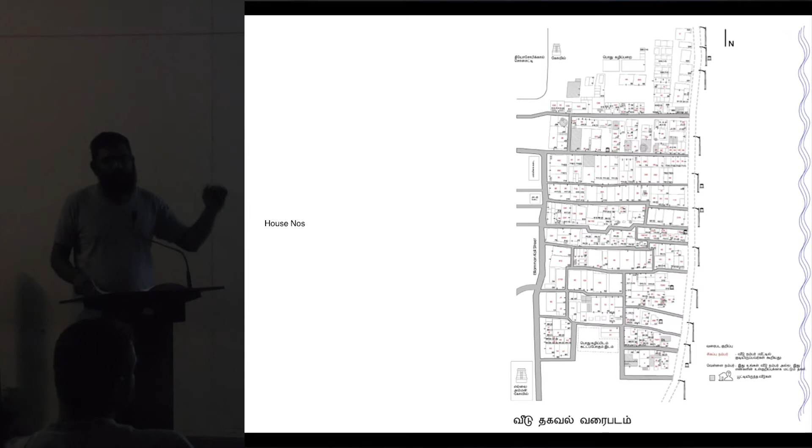Interestingly, most of these houses don't even have house numbers. From the beginning, it was a hurdle, so we actually gave them house numbers. From then on, they would refer to that as their house number for every meeting they would attend. Nature of buildings, whether kacha or pakka, you can see the legend out there.

Building heights, toilet infrastructure map, which was primarily what we were there for.

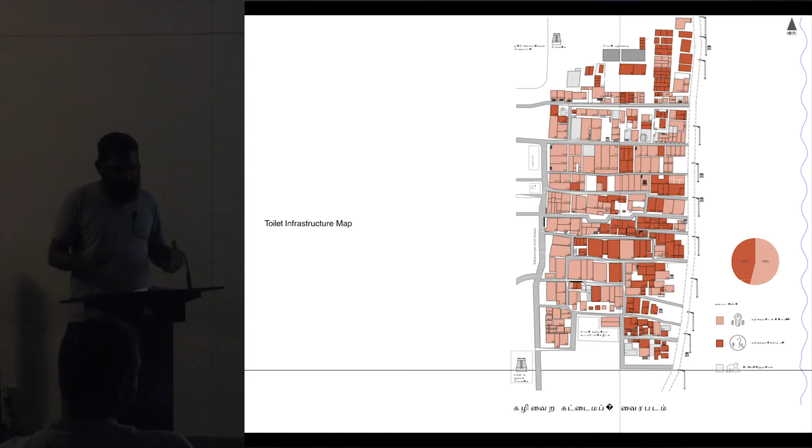What we found was it was not just the untreated sewage, but many of the households did not even have a piped water connection. So it kind of combined both these issues, and the issue kind of compounded.

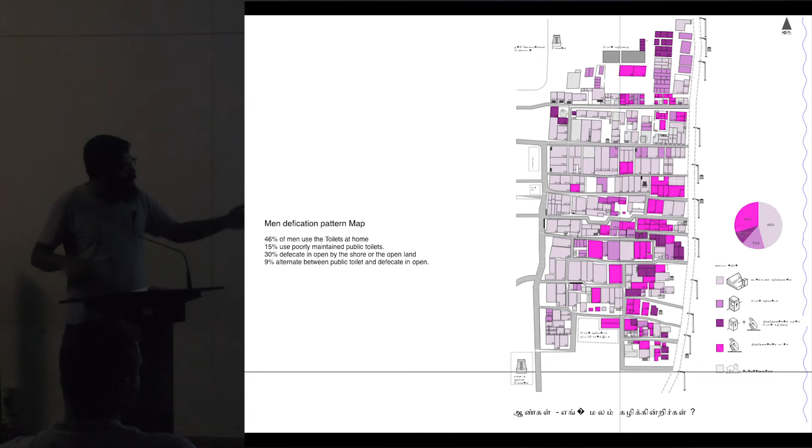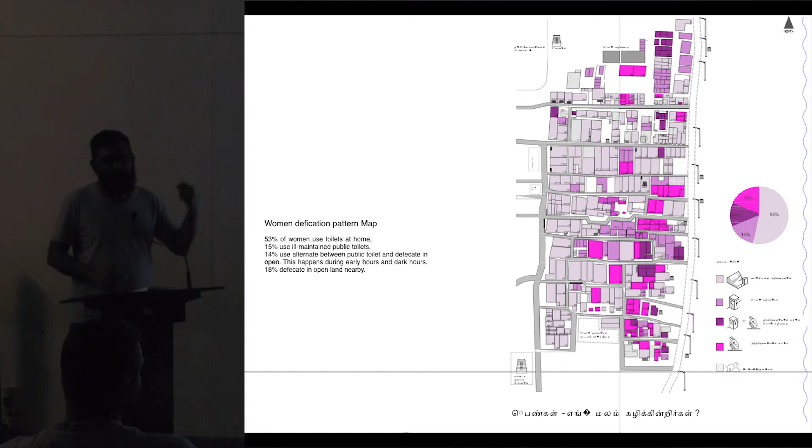This was a men's defecation pattern map, showing when men defecate, in the mornings or evenings, with a completely different pattern depending on the household. That's the women's pattern. Most women would actually defecate in the neighbor's house, or they would choose to go for defecation only before dawn and after dark.

So that was primarily the document that we took to the authorities, to show the wastewater discharge pattern. Roughly about 50 to 60% do not actually have toilets, and it is primarily because of that all these issues were compounded.

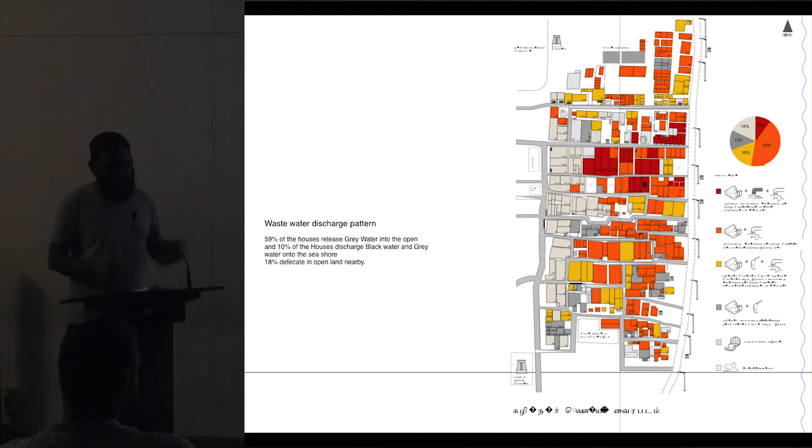We held community meetings to arrive at a proposal. Again, when I say we, it's not just me - there was a collective, urban designers, UDC was part of it. There were also activists, Vetiver Collective, who work with all these - basically environmental activists who work along the shores of Chennai. There were also other agencies who were part of it.

Based on our calculations, assuming 90 liter per capita consumption per day, we arrived at a DEWATS system. So that's basically the proposal of the project.

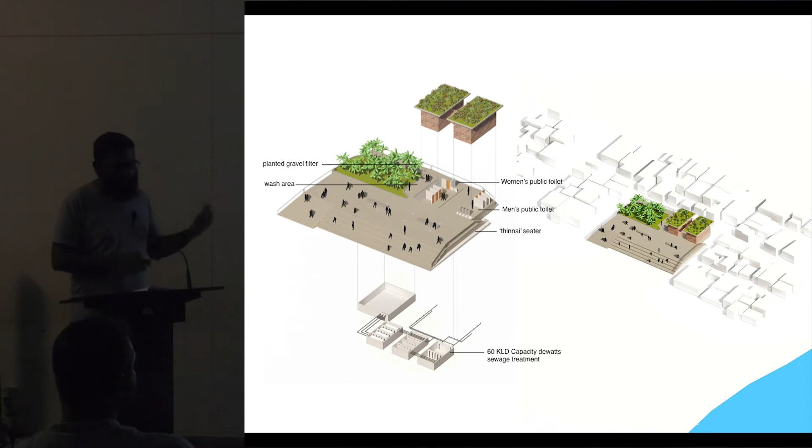We came up with a DEWATS system. On top, it became a public space, and there was a public toilet for men and women added to the commons. This is a project that demonstrates community infrastructure as a public space and helps the village permanently reclaim their commons from the very infrastructure that was denied to them.

The status of this project is funds were allotted for it, but it was stuck for some time since we did not have any local body elections - for almost 3 years we did not have any local body elections. So now things have started again, and hopefully for the community we hope to see this project take shape soon.

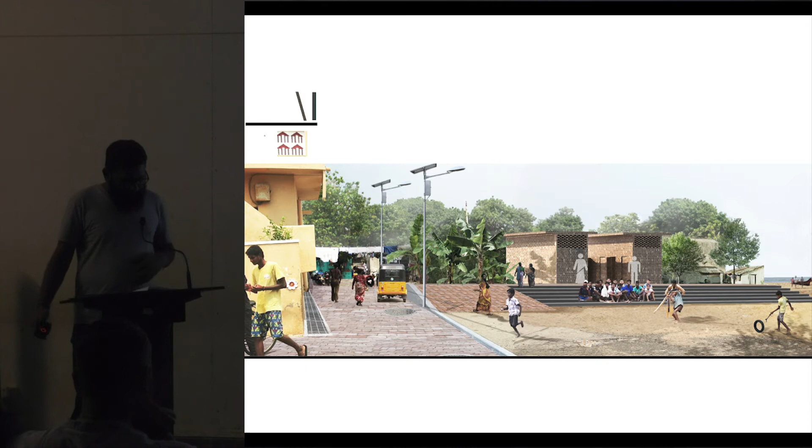What plagues this school is twofold: one is ad hoc construction, and the other is poor infrastructure. Ad hoc construction, because the toilet block is added by an MLA's fund, a local councillor adds a stage for CM's birthday, central funding adds a smart classroom. There is no coherent plan, basically.

Poor infrastructure, poor toilet ratios. I think the toilet ratio was roughly one WC for like 35 to 40 kids, and the standard is about 20 - so roughly you need double the number of WCs. Very high student densities and no separate funding for maintenance.

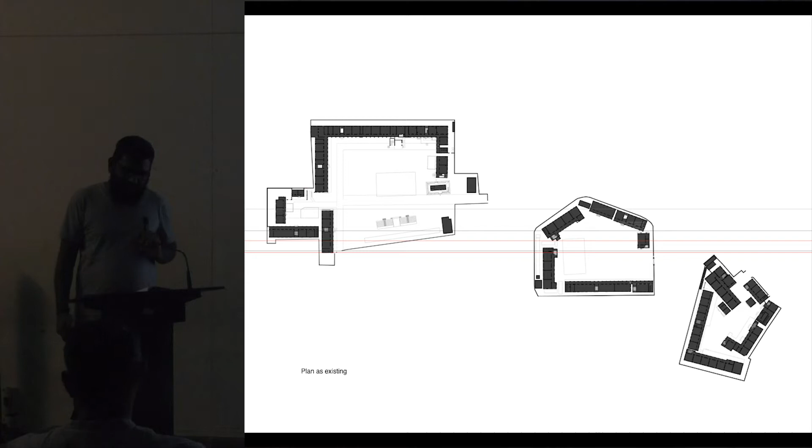While these are visible issues which can be fixed by increasing the number of well-designed classrooms and toilets - this is one of our interventions where there was an existing toilet block for kindergarten kids, and we said we can do this. This can be fixed in some sense, if you have the funding and it is available at the right time.

But what is invisible is the mental state of these kids. Typical demography of the school children is that they form the lowest strata of society. Many of them are raised by a single parent or by grandparents or relatives. Their parents are maids, helpers, hawkers, and daily laborers living in the city. Except for a few teachers, others really look down upon them - that's the kind of mental state of the kid.

This particularly leads to vandalism, theft, and extreme hyperactivity - all these kids are extremely hyper. At this point, we realize the objective of the project is beyond functional requirements. So how do you then tackle such a situation? Chennai Corporation was interested in revamping government schools, and as a pilot, we are now given 3 schools to demonstrate the possibilities of how we can tackle this issue.

We also know that our approach has to be very surgical in nature, as we have limited means to create most change. Design with limited moves that can change the way the kids perceive the school. So I think a lot is about the perception of the school more than actually the physical infrastructure.

So we approached the project like designing in a city like ours, there's hardly anything designed for children, and I'm sure it applies to all our cities. Especially kids from these backgrounds, because people in a slightly higher strata have other places, they go to a mall, there's bowling alleys. But people from the lowermost strata do not have that option, there's nothing designed for them. And this Chennai school project seemed to be the right opportunity for us to work around that idea.

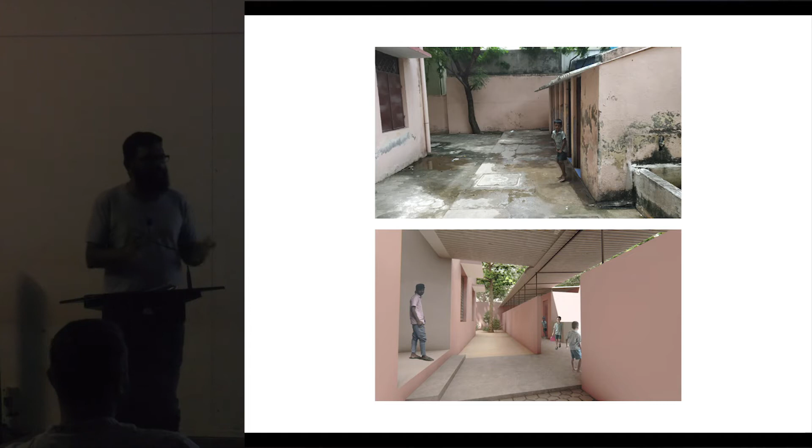We are still kind of tinkering around it, but I'll show you some ideas. So we approached the project like designing a public space for children. We applied all the principles of public space design to enable these kids to reclaim the space in the city, so that when they come into the school, it feels like it's actually for them.

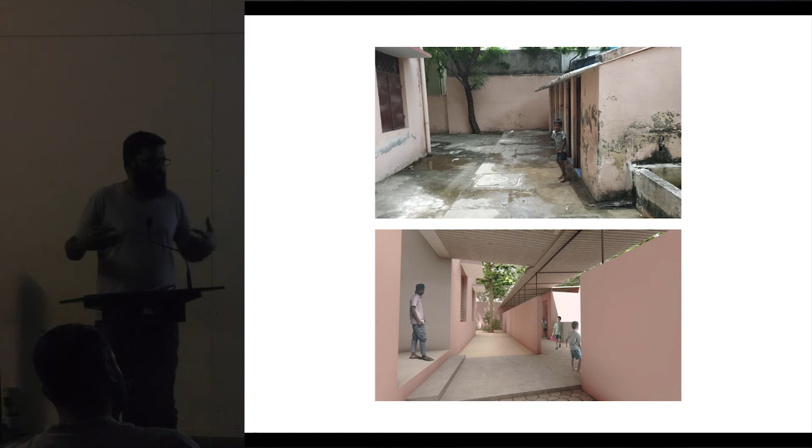So the first thing we did, our first move, was to remove these grills. The reason why this grill was added is in earlier days, to avoid drunkards using the place during after school hours or on Sundays. So they always had the grills. Today they all have CCTVs, security guards, so technically you can get rid of that, and it opens out the place like this.

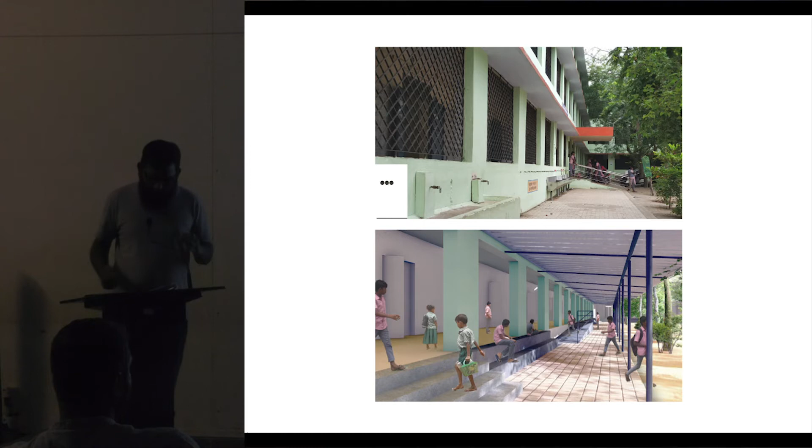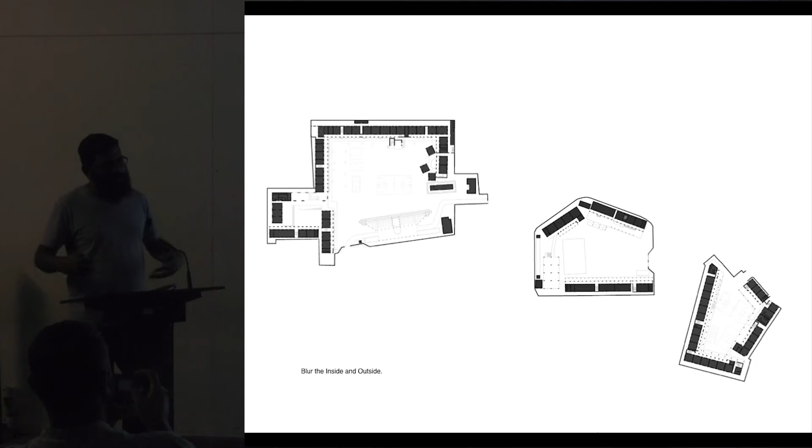We also proposed an additional shaded corridor where they didn't have one. And what this led to, is this existing plan - it's like a nolli plan, blurring the inside and outside. So the exterior became a lot more integrated to the inside.

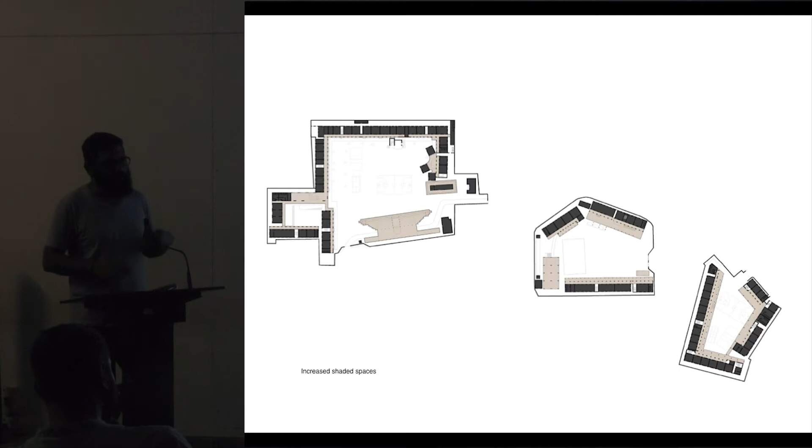It also increased the shaded corridor - these are all the shaded areas where they can conduct different activities. Vertical learning was possible, kids from one group can interact with the other. And if you look at the section, suddenly, this was all the typical section - suddenly all these newer dimensions were possible. New spatial connections were established.

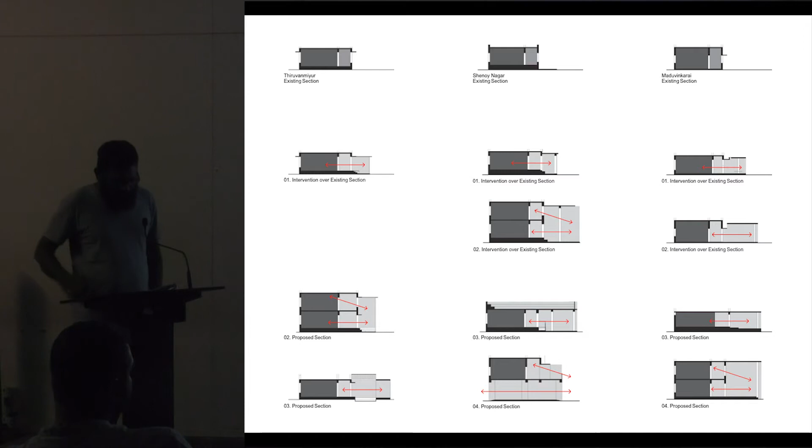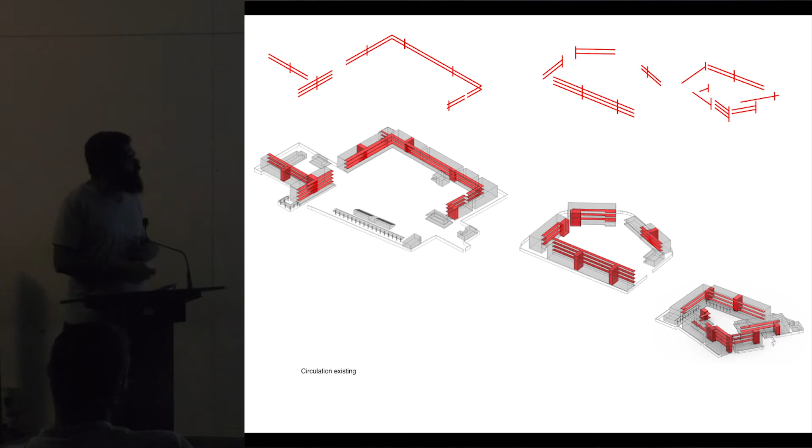Serge Salat - I met this man who basically studies urban morphologies and advises cities on newer developments in China, and in apartheid neighborhoods of Africa. He claimed that the grid is the most democratic form because it offers maximum choices. In order to enable that, we connected all these with bridges. So what was only one possibility for the kid to go up and come down suddenly became like he can climb here, go all the way here, come down here - suddenly the choices became a lot more.

And this we hope will kind of make the school more inclusive and cohesive.

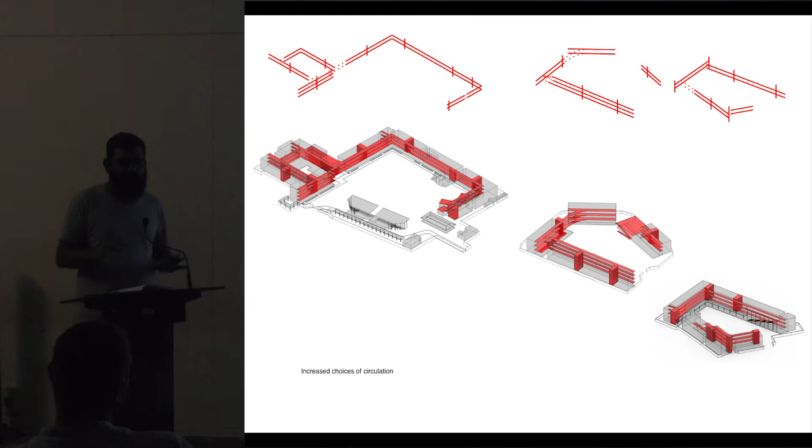We proposed a covered space - after seeing all this, suddenly the deputy commissioner got very excited. He said, we'll give more funds, do more proposals. So we proposed additional covered multi-use space, and finally, like a typical urban space, we added a landmark. So there was a new facility added, at least one in each school depending on the strength, which is kind of unique to that school.

So this is actually a kindergarten in a 3.3 acre campus. They also had partly amphitheater gallery kind of seating, so we kind of added a roof above.

This is actually a school about 1.14 acres, and we added a first floor, just the first floor, which was extended to add a gallery and a kabaddi arena. And in this school, the stair itself became that sort of active landmark.

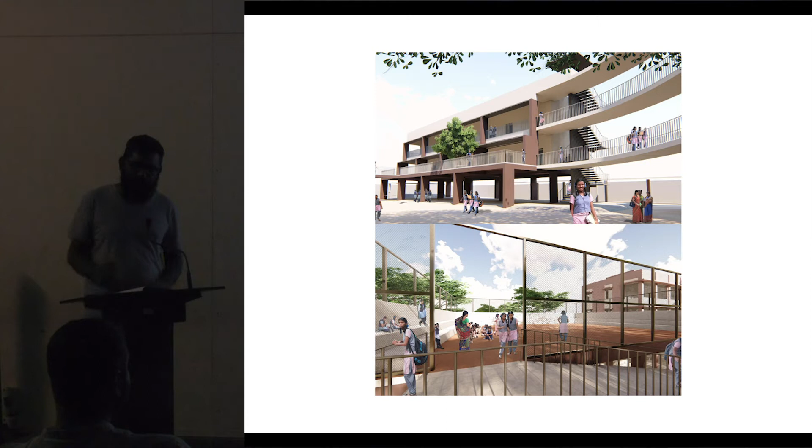So we hope this will bring about a change to the perception of the school, and most importantly, have a positive impact on the child who grows up in these environments. So these are some of the proposals that we made.

Moving on to the second preoccupation, which is in the city. So this is the first project, Shop in a Park - a project about creating a public space in a private realm. If you're familiar with the geography of Chennai or Tamil Nadu, you'd know ECR, East Coast Road, one of the most scenic roads from Chennai that goes all the way to Pondicherry and Rameshwaram, and now extends up to Trivandrum. This is one of the first commercial developments on that road within the Chennai boundary.

The client had dreamt—I use the word dreamt because he dreamt—of creating a typical mall with an air-conditioned atrium. So that was the brief that was given to us.

But unfortunately, the approval for that dream was refused because the site was on an aquifer recharge area. An aquifer recharge area is where you need more land so that the water would go in and recharge the water table, so you need more open space.

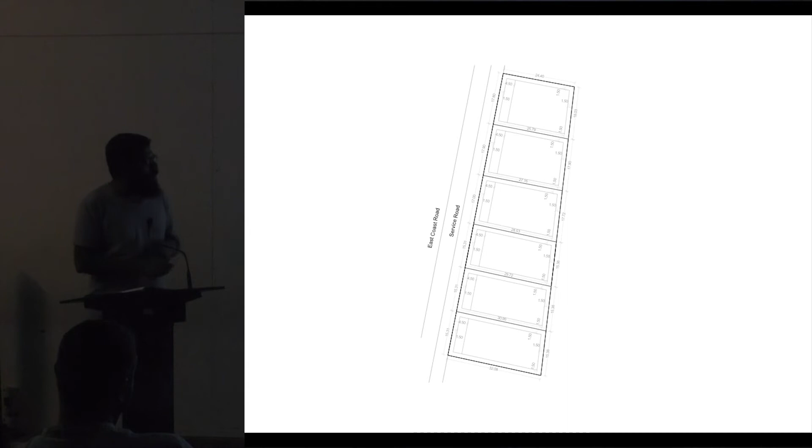So eventually they had to divide the land into 6 such blocks, and each one had a separate block. So what was a kind of cohesive atmosphere of a mall suddenly became like 6 blocks. And that was essentially our challenge—how do you work with that to create a commercial space?

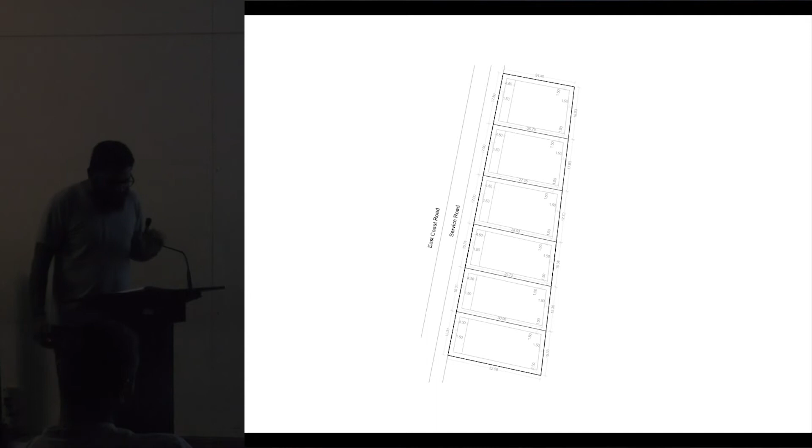So first, what we did is we put all the blocks together. If anybody who has worked in a retail environment knows, the interior of a retail environment is more like a mediated experience—your experience is less sort of spatial. So we wanted to create that spatial experience through this project.

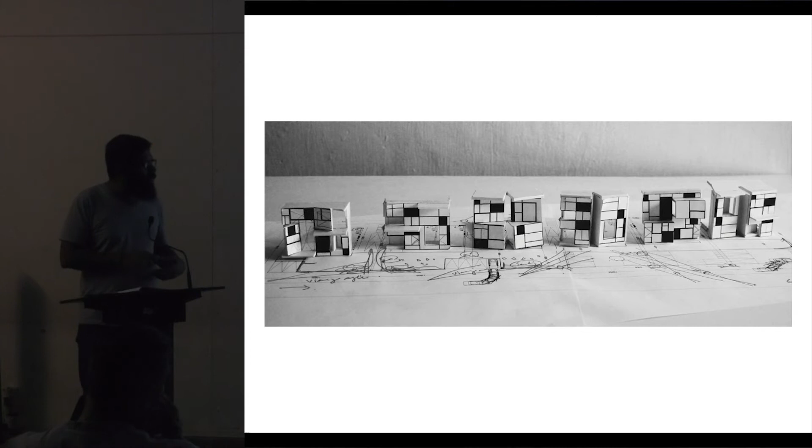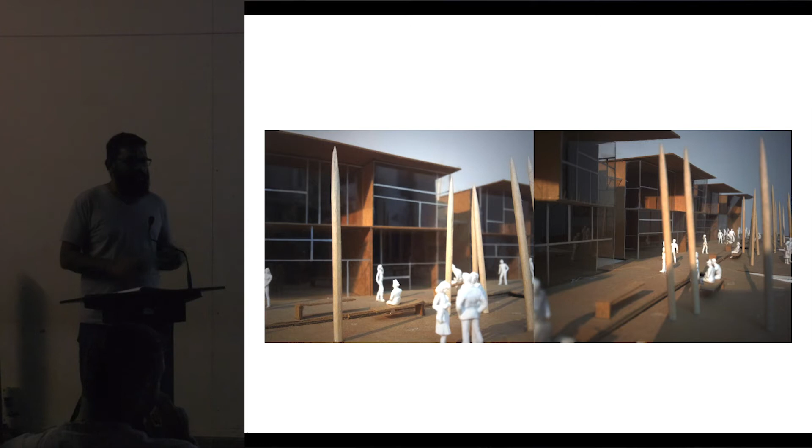And the first move we did is to articulate the facades, create some interest to break the monotony. We also knew the blocks needed to have a canopy because it was west facing, so that added the next layer.

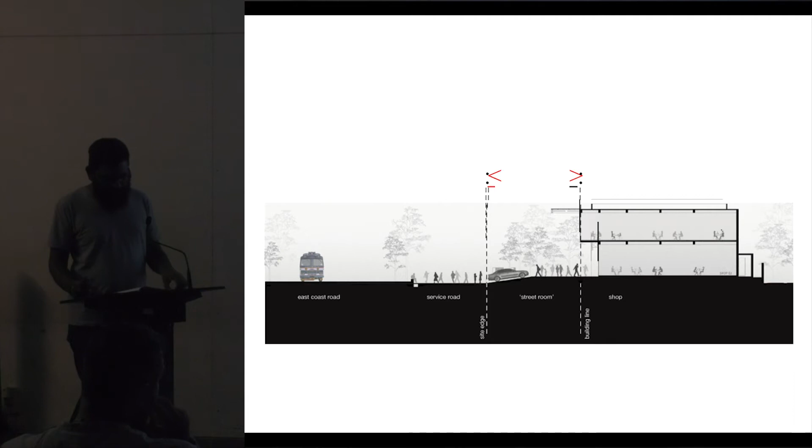So our intent was to design a public space. We designed basically a street room. We found this text by Guy Debord that puts the idea more eloquently, but we found this much later—at that time, we called it an urban room.

The notion of a street room reverses the false distinction of open and closed ambiances. The closed ambience itself opens onto the open ambience, which is demarcated by a closed ambience—basically, two different conditions defining each other.

And there it was born, the idea of a shop and a park. So we said, okay, these blocks were shopping blocks—what if we imagine the space around it as a park?

And at that time it also dawned on us that in order for this project to be held as one cohesive space, you needed a continuous roof, not a roof that is sort of separated.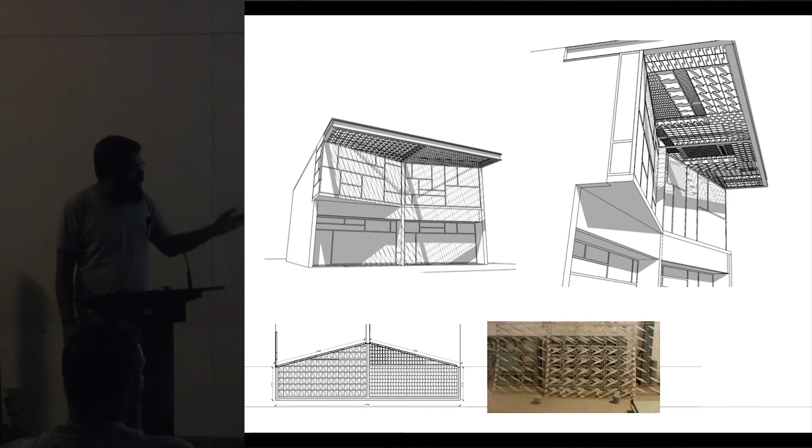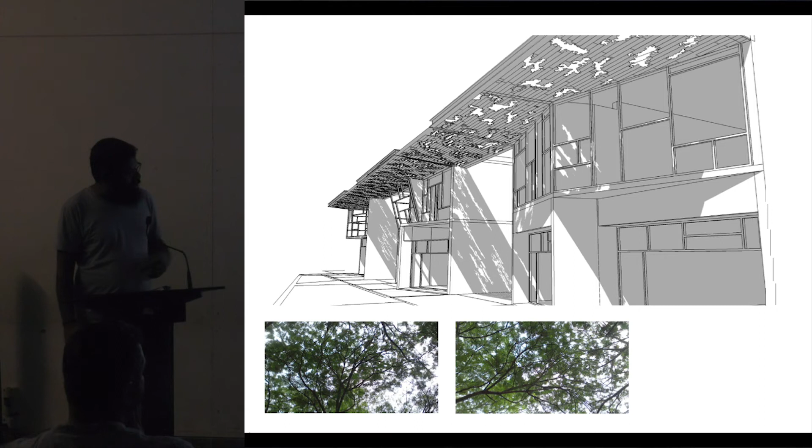We did various iterations of the roof using different materials. This is a laser-cut steel scrap which we used as a roof. This is again laser-cut, of a different size. This one is punched—this is a perforated sheet, cut like a canopy, like shadows.

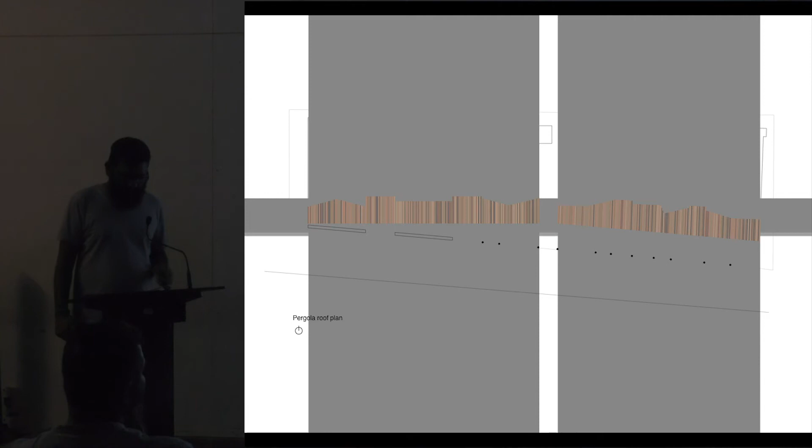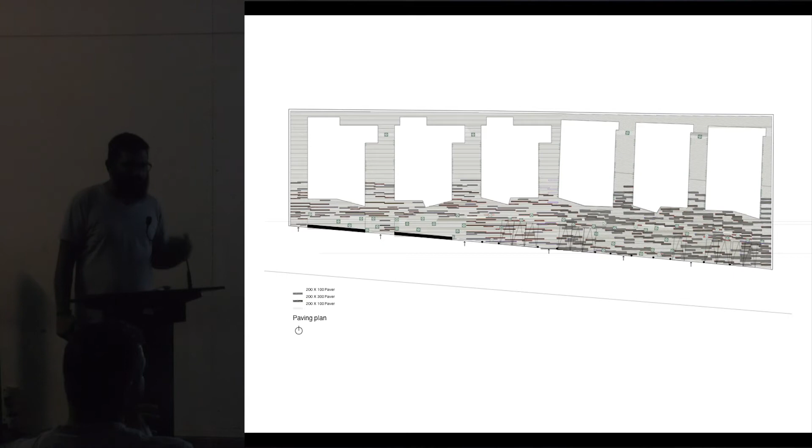And then finally we ended up with good old pergolas as the roof. Once the direction of the pergolas was decided, then we decided the direction of the paver as well. And that's the project.

So this was the first commercial project on that stretch. The moment we completed this work, we had so many offers—like everybody had a parcel of land and wanted to do something similar.

And suddenly there were many copies on that street. So these are like 2 such copies. This guy, in fact, was the first one to come to me, and the moment we gave a quote, he never turned up—and then he had the same canopy, same gray, ground level.

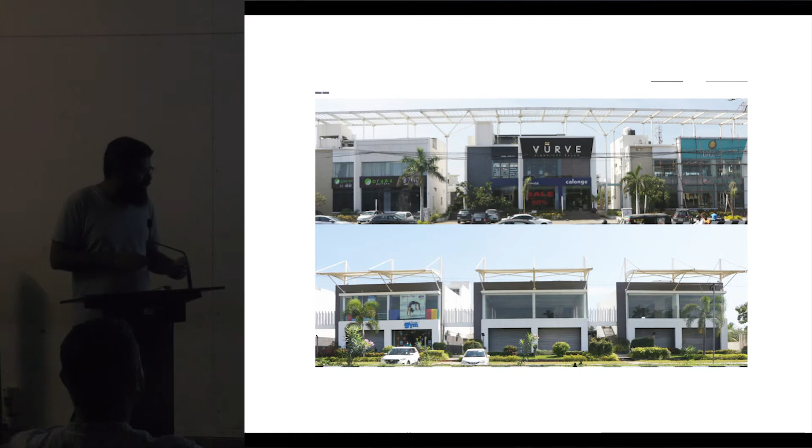And this was another one, which was actually happening in parallel. The moment we put a canopy, he put his own sort of trellis stuff.

And what happened is we ended up having another client who said, we want you to work with us—same 6 plots and same 6 blocks.

So we took the idea of the street room and created more meandering spaces—so this is the service roads, and from here you create more meandering spaces. And this was the first proposal we gave.

Unfortunately, we didn't succeed in our efforts to convince the client. The client was extremely stubborn—they wanted only a sequel to Shop in a Park. They were clear, they wanted the same plan. It works for Vastu, nobody complains—so they just wanted the same thing, right?

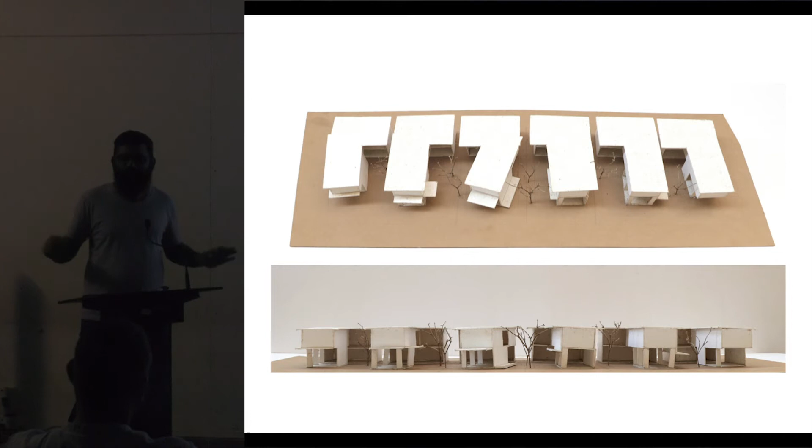So what we did is we kept everything the same, except that we added a sort of—in Tamil we call it pandal—which is like a tent-ish kind of structure. And that's all we did. It's the same block, we just added this.

And we thought this is a good opportunity to explore the idea of public art in a private building, because the entire thing is open for you. So we wanted to work on some kind of graphic around this place. What I'm going to show you next, the set of 6 slides, is what we showed the client, except a caveat I'll tell you at the end.

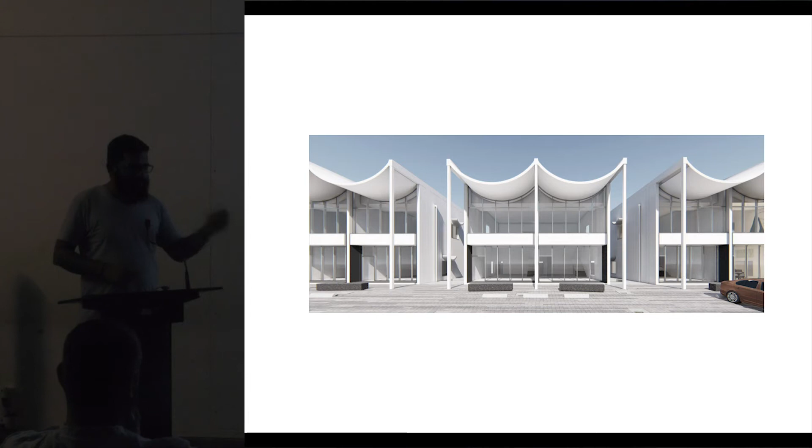So we said, today's religion is consumption. And temples are today's shopping malls, right? And they had frescoes then, so you ask what's fresco today? Basically these frescoes, these murals, were interactive and participative.

They were either preaching something, or about conduct, or about myth, all kind of bringing you closer to God. So what is today's God? Your products, your iPhones. So we made a list of products and said okay, we'll just throw them around the ceiling. We call this the black hole graphic. It's about consumption, an object, a brand, a lifestyle, things that suck you in, objects floating in space without reference.

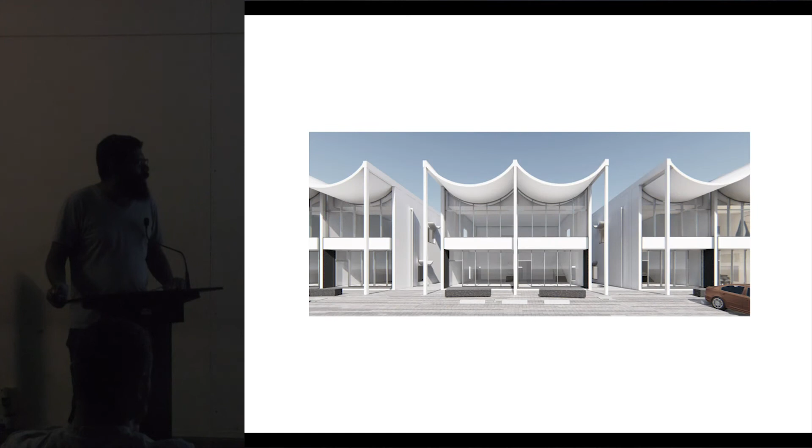It's kind of participating, that's the issue. Once you identify one object, you start slowly looking for what's the next. And then this is what we did, from there to there.

And that's the street, and that's the project executed. We are in the final stages, so that's the executed project. And the caveat is we did not show him the black hole concept, we just said these are flowers of consumption. And they bought it, so I'm happy.

So the second or third project in this is a book building, one of our first projects in Chennai. In this project, patterns that you see every day in a city are used as an iconography. It was for a client who made these beautiful handmade books, if you know Tara Books. So our client was that, and it was on a tight plot.

So this is the book. It was an extremely tight plot with a laundry list of requirements. The building should house a bookstore, small exhibition space, administrative office, editorial, and accommodation for visiting artists, all packed in this space, almost like Bombay style.

So the design was fairly simple. We exploited the bylaw. In Chennai you can either do stilt plus two, or ground plus one with a mezzanine. So we combined these two bylaws to create the basic organization, and it went from public to private.

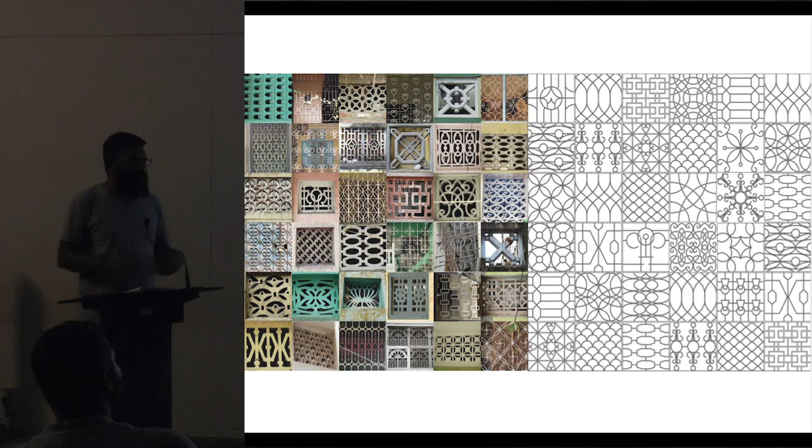And then we did this collage of grills, which became the sort of image of the place. For the making of these grills, we had a fantastic fabricator doing that, and that's what it does when the sun shines. That's the project.

We designed the top floor accommodation almost like a village. We called it the village because the first story they said is, this place needs to have warmth, because most of their tribal and folk artists, when they come to the city, just can't relate to it. So they needed that, and this is probably the first place they'll land up, so we wanted to evoke that sense.

That's the exhibition space. That was, I don't know if it still is, at that time the largest Gond art by Bhajju Shyam. I think he won a Padma Shri last year.

And that's how the space is. It works with the community. They do workshops, it's kind of open. The ground level is pretty much open, anybody can just walk in.

And the success of the design is, this is on the tote bag of Tara Books, and they use this in the exhibitions. So when we saw this, we were kind of laughing to ourselves, patting us at the back, saying that yeah, I think you really came close to the ethos of the place.

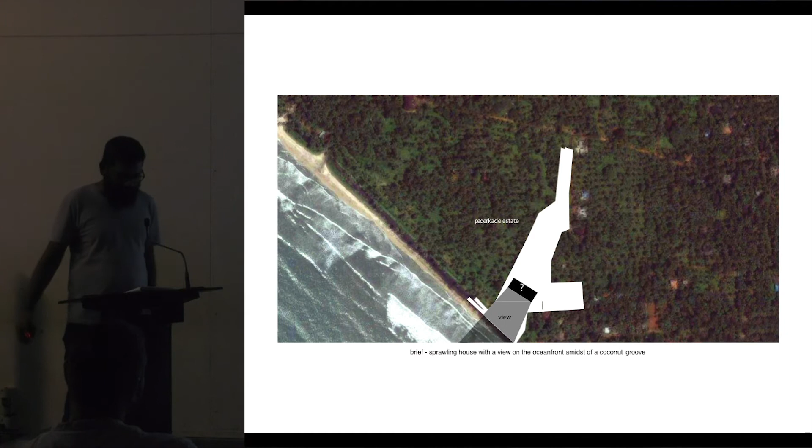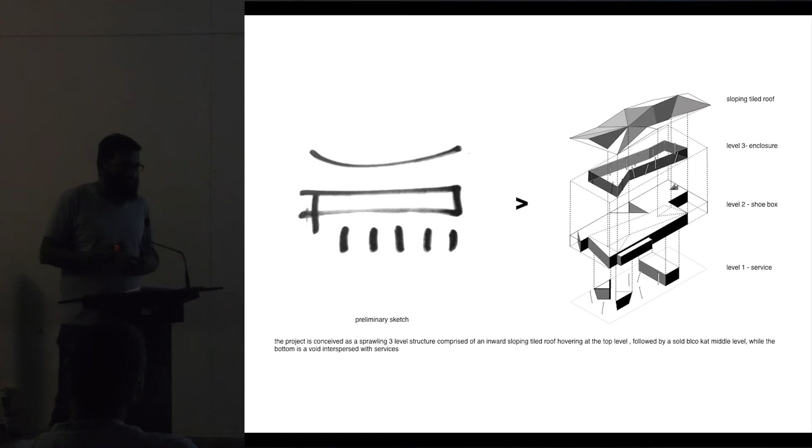So that was the preliminary sketch, and that's how it kind of took shape. I said, I will give you all that you ask, but I will give it in the way we want to give it to you. So that's how it kind of panned out.

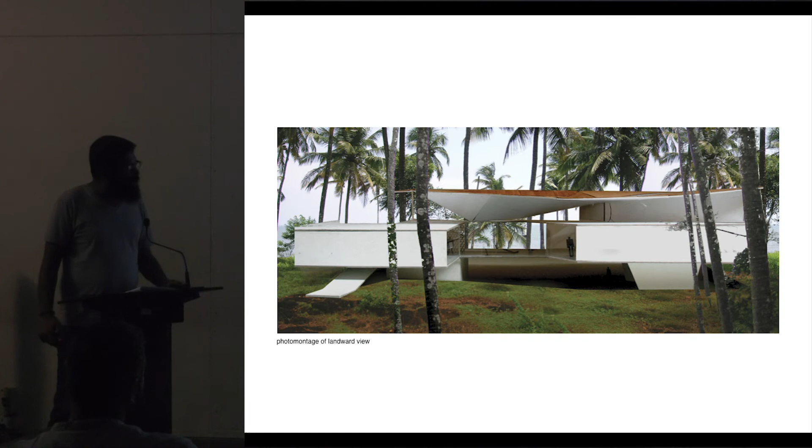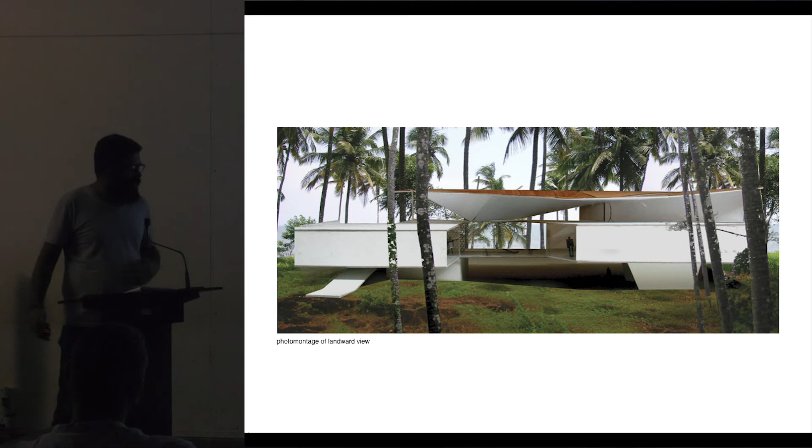And this was the initial model that we sent. Actually, after we sent this presentation, they never got back to us for like a month. And after a month, we got a call saying that we didn't understand what you had actually sent, but we are coming to Chennai and we would like to sit across the table and help you explain what you have done. And luckily, they bought the idea.

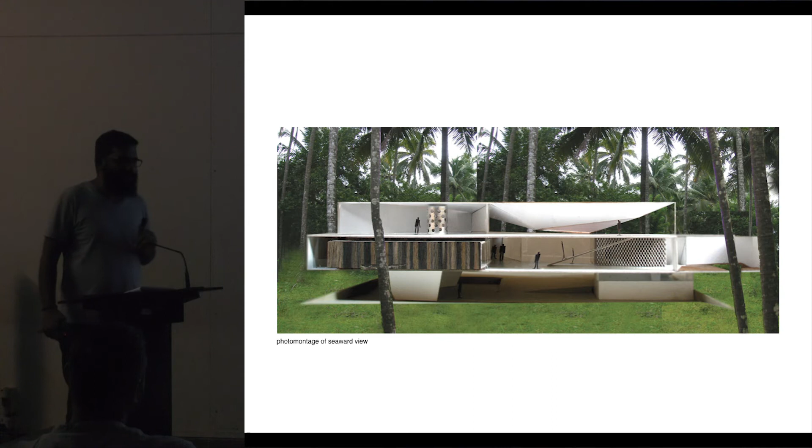We went up to the approval stage, and that's when fate has it - there was this market crash in 2008. So the client developed cold feet, and then came our next project. I'll just talk about that in a minute.

And then came Kochivide. So, is there any Malayalis here? I'm sure there must be Malayali, how can we not have a Malayali here? So Kochivide is actually, if you're Tamil, Chinnavide, it's a concubine.

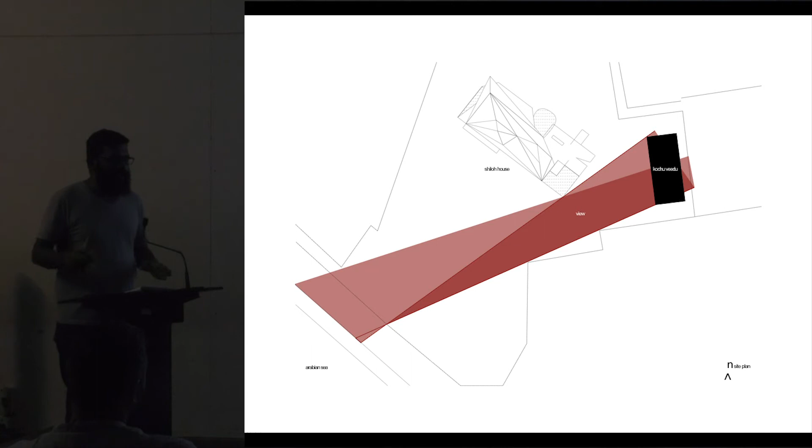Okay, so we said we will have both the houses in the same plot. So it's an outhouse actually. That's the original house and that's the Kodiu Veedu we did, right? So we said we will follow the same logic, we'll have a shoebox plan and a red tile roof. Only the stilt was missing in this. So we kind of went about this design.

The cube on top was shifted for views, privacy, and then it ended up something like this.

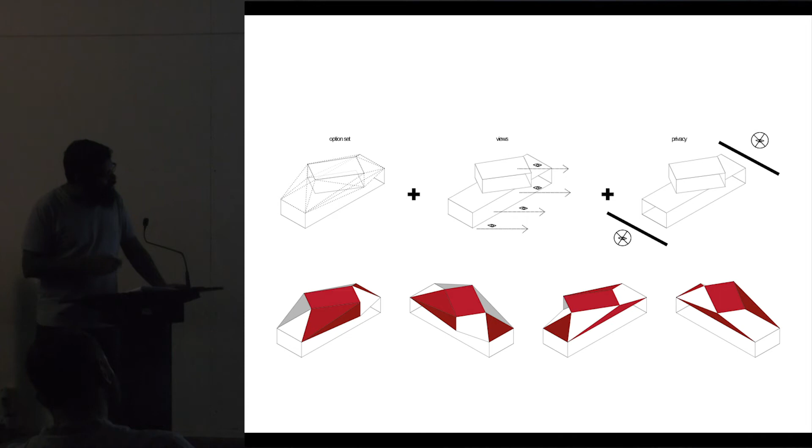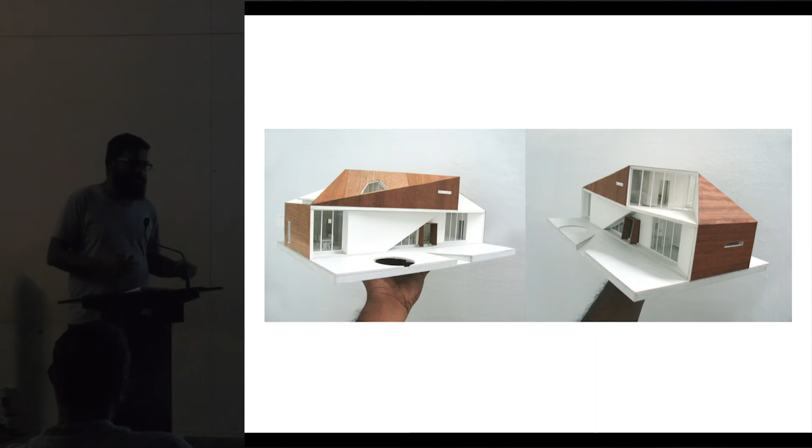And I'll just go through the tiles. We got one of the best Mangalore tiles. I personally went to about 25 Mangalore tile factories, because today they don't make tile from clay, they actually make from clay powder, so it's recycled. Those tiles, if you just drop from like 2 inches away, they can crack. But this was one of the best tiles that we got.

The next project is the title itself. It's an office, a small office, site office, which is around a tree. The cashew tree became the deciding factor in the project.

So there was a small plot. It was a 32 villa development, and the first plot was developed as a site office. There was a beautiful cashew tree, and we wanted to sort of retain the cashew tree. And what came about was this.

Since it's a small office, we kind of organized it from public to private. It became a linear organization, wrapped around it, and then decided on the organization, decided what can be open functions, what can be closed, and the plan.

So the model kind of shows how it kind of starts, 7 feet, touches the ground, and kind of slowly raises up. At this point it is 10, this is 10 feet, so 10 plus 3, that's 13 feet from the ground. It kind of meanders around, and that's a completely insignificant entry.

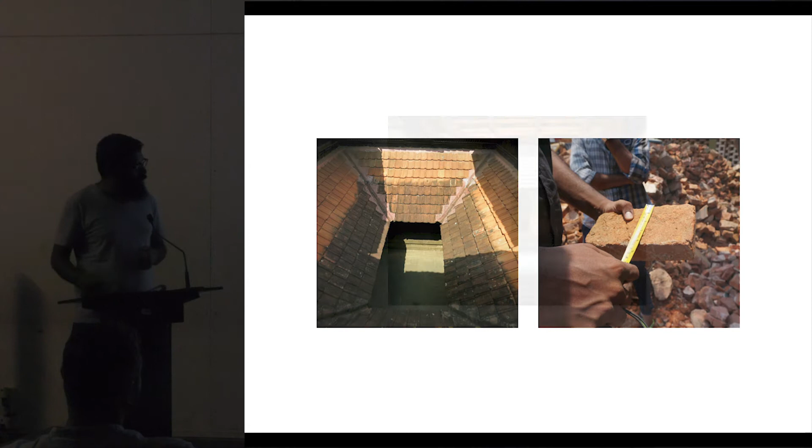What was interesting was this kind of memory—a void, but at the same time it evokes a lot of memory. We wanted to create this sort of spatial memory in the project, so we had a typical traditional courtyard and used the reclaimed bricks.

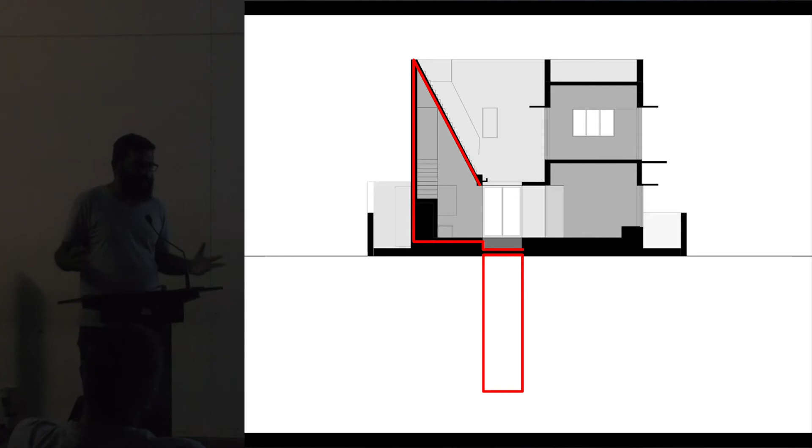This is from Padmanabhapuram Palace, because the wife was from Kerala. We used that as a typical section of a courtyard, working only with the section—making the court rather linear and increasing that section. That section became the project, and this spatial void anchored the entire project together.

Then came the most difficult part: how do you find reclaimed bricks? We had no idea, so we went around asking and settled on a few demolition contractors. It was a painful 3-day process.

We had brick warriors in the office—three guys handling this. The first day morning, we'd get a call from a demolition contractor saying they were going to demolish a house, and in less than 24 hours we had to say yes so he could sort the bricks. In that time I had to test the brick, check the compressive strength, and confirm we wanted them. Then he'd sort and load it—roughly a 48-hour process.

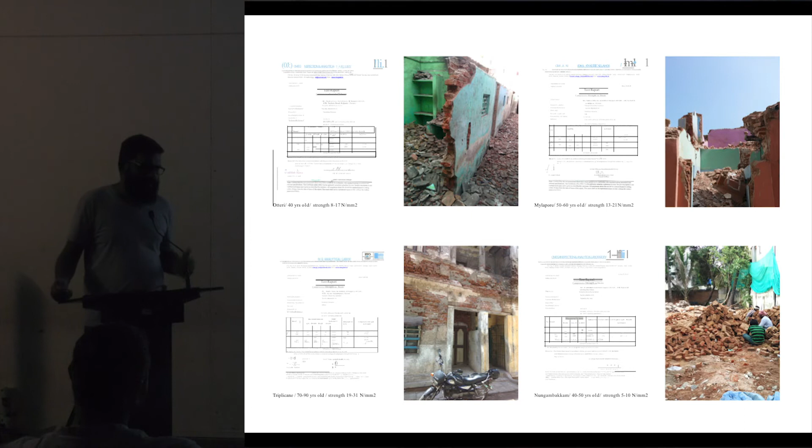We did this for about 45 sites. Some of the bricks we found were stronger than today's concrete after 28 days of curing—look at that, 21 Newtons per square millimeter. That's the strength of concrete, the minimum we test for. That's 28.

So that's the courthouse, a suburban house, and these are all the places the bricks came from. Once we got the bricks, it was simply putting it together and doing a beautiful brick coursing. We even did a whole set of drawings for fancy brick coursing.

Then finally we decided the bricks were so beautiful—weathered, each one in different colors—that we should just retain that and keep it simple. That went on, we did the drawings, and that's how it turned out.

Once we decided the exterior would be reclaimed bricks, we wanted the inside to be something else, not brick again—we wanted to create a world inside a world, which is the phrase we kept using. So we used titanium plaster, almost like red oxide but using titanium oxide, which gives a lighter gray finish, and that's how the place is finished.

Very simple details with Z sections, industrial Z sections. I'm not sure if you get these anymore.

The doors were reclaimed as well, teakwood doors. These were all old government doors—if you've seen that government grey paint, like PWD grey paint—almost all of them are fantastic quality teakwood doors.

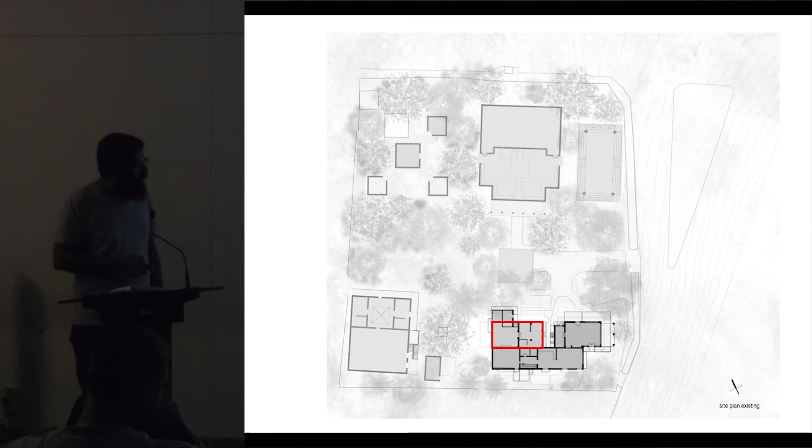They were meant to be an additional challenge on the existing footprint as well, so there were two vernacular styles, and anything you put here, it's going to be obvious that it's a new structure, right?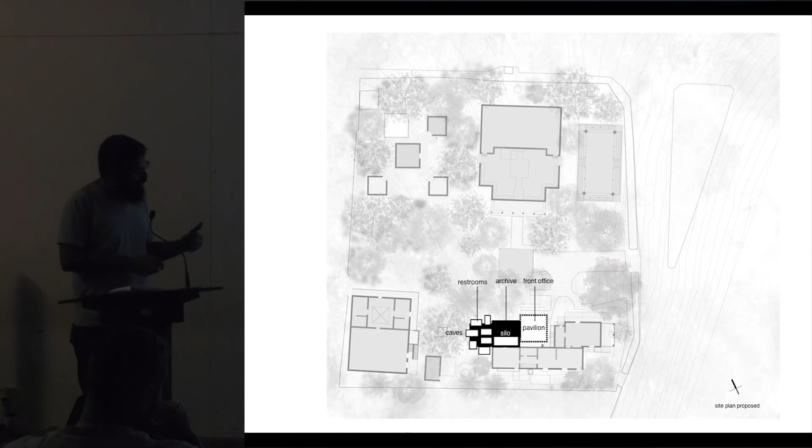So first we solved the organization. One problem with an archive is it's basically a dark space - there's no spatial articulation, you want it boxed so you can preserve the stuff inside. So we added a small pavilion, more like an office space. The place also needed some toilets, so we made those look more like caves you meander through.

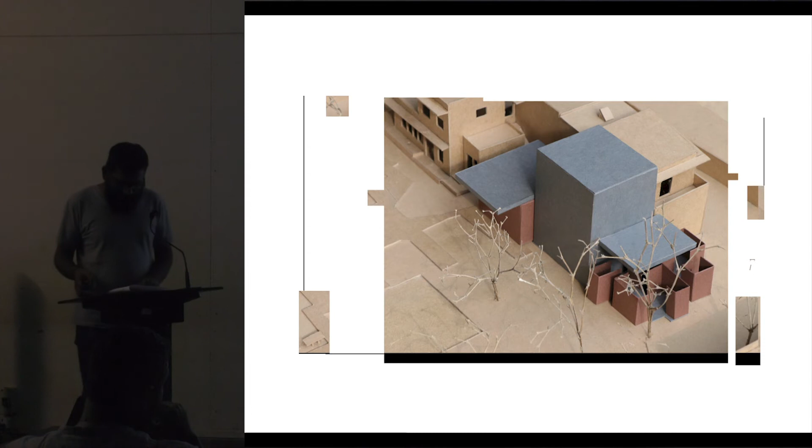And one of the principles that governed this project was that the proposed structure should not be a generic brick plastered white box, although our budget only allowed for that. As an intervention, it should complement the sense of time embedded in this setting. The new addition invariably will reflect the current time.

So we asked ourselves the question, can we create a sense of time that is abstract? We wanted to create something people thought already existed here. Everything about it looks new, but it has a kind of age to it - a bit of now, and also its past.

So if you ignore the style, like if you see a ruin, you don't know the age of the ruin, right? But it's a ruin and it's kind of in the process - there's a time embedded to it.

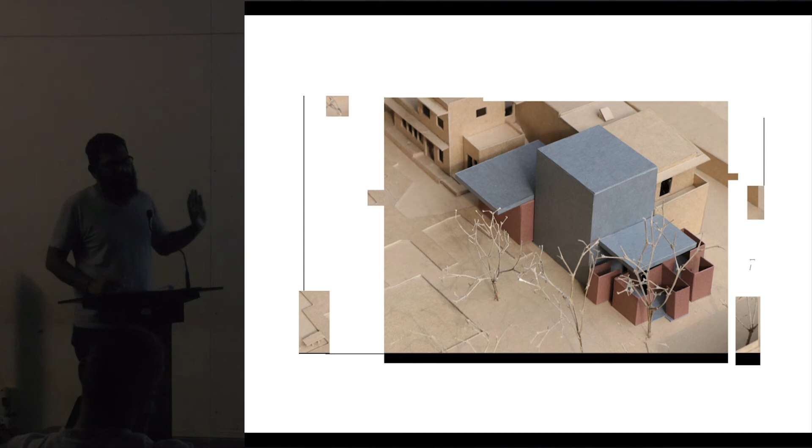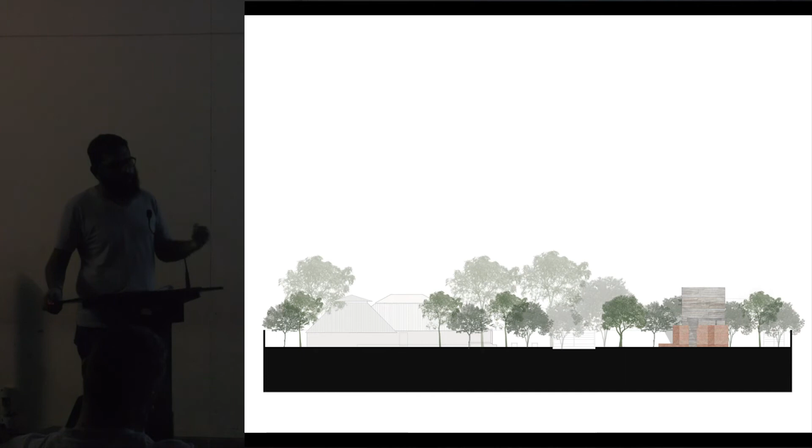So we thought, if you look at some of the vernacular structures I showed, what expresses them is pure construction. So we said we want to make this entire building an expression of pure construction. The mold of concrete and the brick coursing became the entire project, so to say.

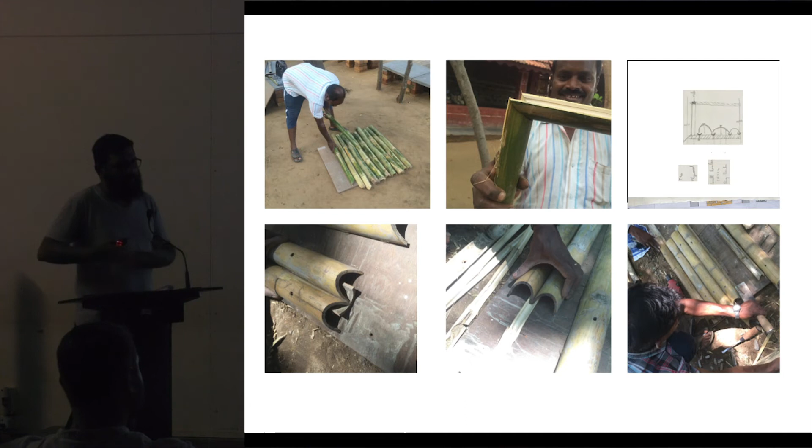What we did is we made the concrete mold using bamboo shuttering. We worked on different options. That sketch was very instrumental - you use one bamboo piece like this, and also a small one like this, to make sure the cement milk does not escape, so the texture of the shutter finish is carried forward. That became a sort of expression of the project.

So today, if you walk into that place, you would wonder if this is something which existed here as long as the place existed.

Interestingly, the story of this brick is, after we finished all the other courthouse brick, this contractor says, 'Sir, I have 1.5 lakh bricks from one site.' I said, 'Okay, please bring it here, we will use it for this project.' And that's how this entire thing was from a bungalow about 70 years old in T Nagar.

And that's the pavilion - the floor is polished concrete. We work with limitations, all our projects work with extreme limitations. This is like a chipboard that they use in cargoes. And that's the toilets. These two materials and the expression of these two materials became the project itself.

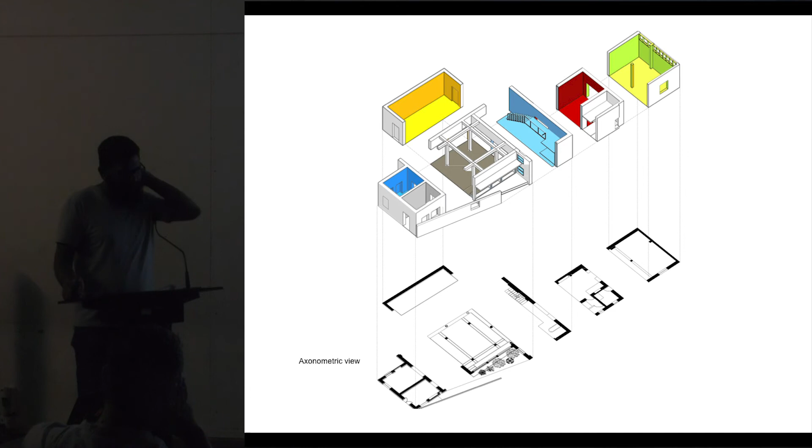So what was interesting is we kind of teased out the organization which was not visible in the site earlier, through color. So once we decided we were going to paint it, we knew it's going to be cold, so we called up a friend who was a graphic designer to add some graphic content that would make the place livable. The lighting, again, another friend, Dan Flavin-inspired lighting which uses fluorescent lamps, was employed to kind of build this whole space together.

I started my presentation with the note that we do not have a homogeneous ideology. As you must have seen, our ideas are tempered by the context in which we operate. In all this, our search is for the beauty in the pragmatic, and that's all we try to look for, because we don't really decide anything in the process of doing a project. And I would like to leave you with this slide. Thank you so much. Thanks.

Thanks, Mahesh, for that wonderful presentation.

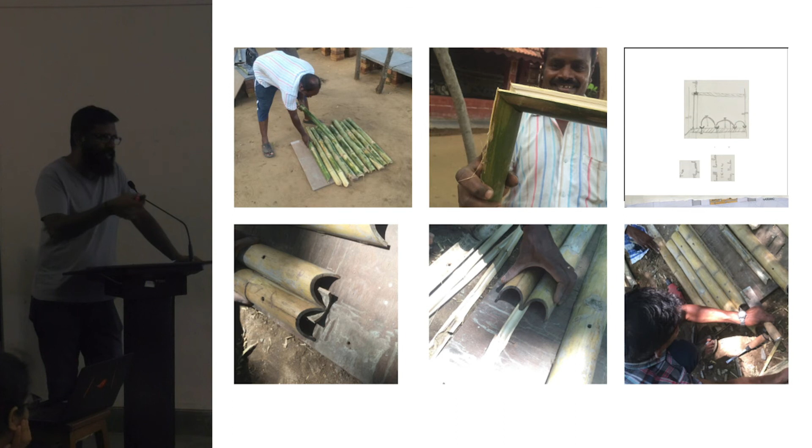Let me just go back to that slide. Okay, so that's a typical shuttering board, which is a ply board. On top of it, you mount the bamboo, and there is another piece here at the bottom which holds the cement slurry. The moment this isn't there, your edges keep chipping off by the time you remove the shuttering. So this is to take care that when the de-shuttering happens, the concrete at the edge is fully cured. That's how it's made, and you have to select the bamboo. So you see he's nailing the bamboo strips onto the ply board, and they're kind of bolted and raised. Each lift is about 2 feet, because that's the workable size. Not every day, but once a week, they would come and pour 2 feet of concrete, and then lift the same thing to the next level. That's how it goes.

And another question, related to the first project about the schools you did. You started by saying that these children were of a low strata, and apart from some of the teachers, most people looked down on them. So the modifications you did to the school structure would really help boost the students' confidence, but how would that take care of the teachers' mindset? Do you have any thoughts on that?

See, I think it's a larger problem. Even teachers don't have a space for themselves, so you actually provide that. You take them seriously to start with, and then enable their engagement with the students. So as part of the project, every school actually has a teacher room where teachers can gather, if they have a birthday or if they just want to discuss things. In a typical government school, it doesn't really work that way, people just assemble there. There are tables all over the place, funds keep coming in from different directions, and they're always answerable to the commissioner.

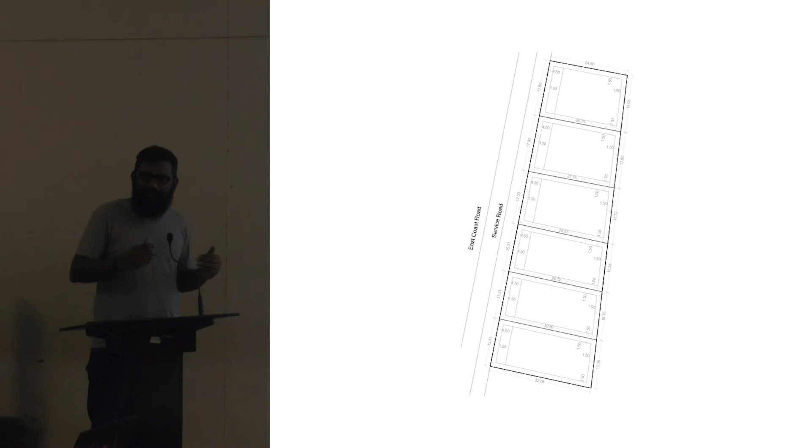But they also specify the minimum size of the plot, which is this - you can't go less than this. In this, my building is somewhere here. So 60% is open, only 40% is ground coverage. The moment that rule applied, you end up having these setbacks free, and that was the problem to tackle.

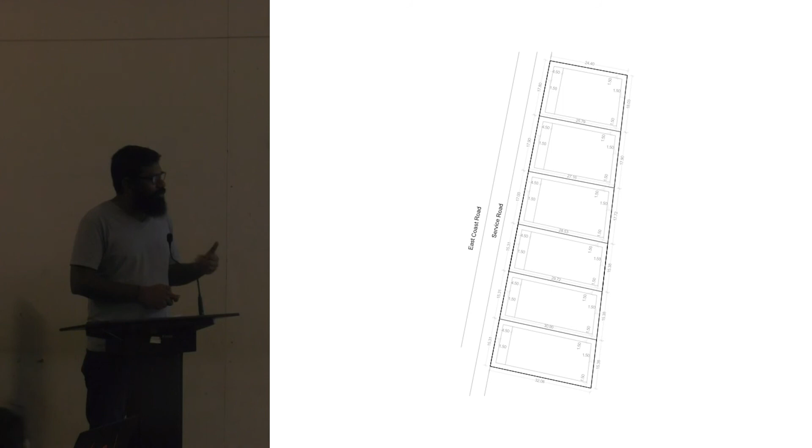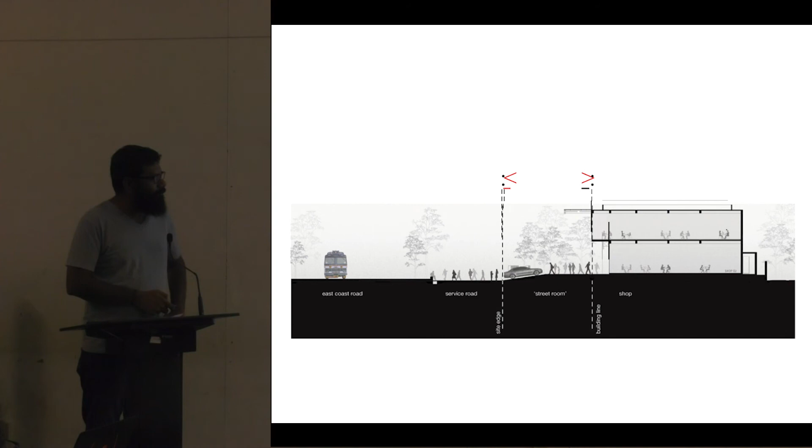And that's what we tried to do with the shop in a park, where we tried to connect them with a single canopy so that you perceive it as one space - that's what we tried to bring to the table. This is what it is. So you see this, this is the setback - after the setback line, this is what happens. There's a 5-meter setback in front, 2-meter setback on all sides, and that's the plot line, if I draw it somewhere here.

The spaces in between two plots, that also is a concretized area. Yeah, it is, partly. So if I'm not wrong, for the aquifer recharge, shouldn't it not be concretified? Basically what we've done is paver blocks, right? So paver blocks can seep in, since it's on a sand bed, so it can kind of seep in. So that's the detail.

So when you take up social projects like Urur Kuppam, the first project, there's no, like you said, you guys as designers choose which one. Yes. How does that take place? What is your priority when you're choosing something? And because you'll have to wage a long battle with so many authorities, so as a firm, as a collective, how do you take your projects up? Is it based on simplicity or priorities?

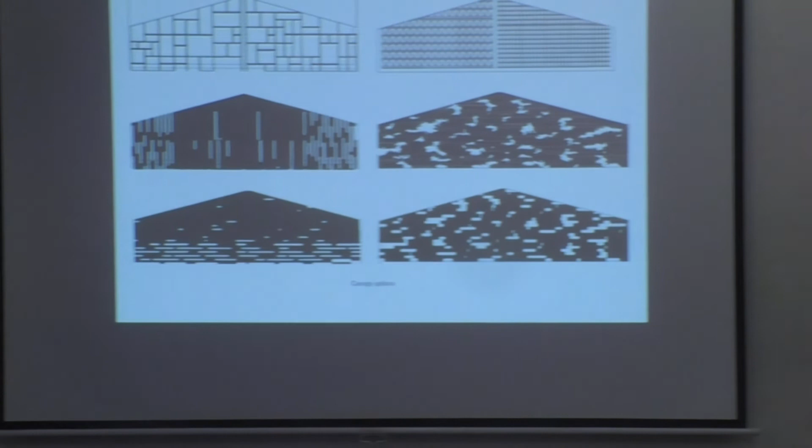What do you think made you particularly interested to come and situate in such practice again, working with the municipal corporation or with any local bodies for that matter? I mean, I think like any architectural practice, you kind of thrive in the private realm. It's a given for a city like Chennai - we actually don't have an urban design practice. There is no urban design studio in Chennai. I mean that's crazy.

On one end there's a lack of enough people doing work at the city level. Personally, for us, I think it's about effecting change. For our studio, I think that has been our approach to these projects — if we can effect change through our discipline, that's the best thing that can happen, and that has been our motivation. The third part is, I think there is now more money in the government's coffers for these projects than in private work.

Look at our cities — you have to go through a compound, and then you have fancy marble picked from here and there. What's the point if you can't step out? So I think that is a very important space we want to explore, and also want to take claim of, because right now an urban designer from elsewhere can come and operate, but we know the cultural status quo, and we can bring in something that people from outside cannot. So we proudly take that claim when we work on these projects.

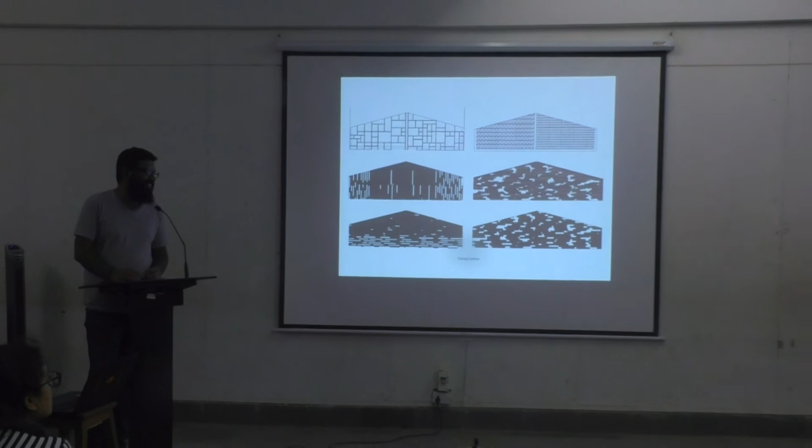I just remembered an anecdote Kishore shared with me about the courtyard house - that municipal representatives would come asking for property tax, and seeing an unfinished building, they'd collect a lower tax or something like that. Now if you have some strange anecdote, go ahead.

See, the thing is, there are certain conventions. When you apply for a loan, the first stage is foundation, second stage is slab, third stage is this. And when the project comes to finishing, it has to be plastered and door frames put in. In all our projects, we have a problem - the last stage of money the client never gets, because he says either it's not plastered, or if you use aluminum frames, those come last, so there's no frame. So in most of our projects, that's the case. So yeah, I guess you'll have to live with it.